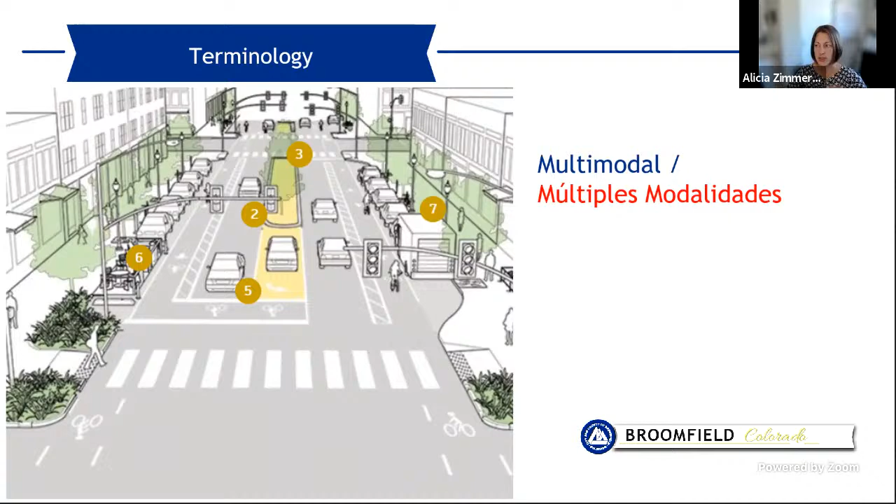Also, right next to them is a bicycle mode of travel and a facility for them. There's parking as well, and pedestrians along here. We're also considering transit, and making sure we consider the full range between pedestrians and bicycles, those in wheelchairs or on scooters, that type of thing. So multimodal means multiple modes of transportation, which is what we're focusing on.

The second of three terminology slides talks about the pedestrian realm. Sidewalk, most people are familiar with that one. In this case, the yellow shows what we call a detached sidewalk, just away from the back of the curb. An attached sidewalk would be if this graphic showed a sidewalk in that orange area, meaning it's attached to the curb, right at the edge of the roadway. Those two types of treatments feel very different, so we'll talk a little bit about that.

A multi-use path is also usually behind the curb. We're talking about it here as something that can be right behind the curb or further detached, and is usually a little bit wider than a sidewalk. The goal for a multi-use path is usually to accommodate those on bicycle as well.

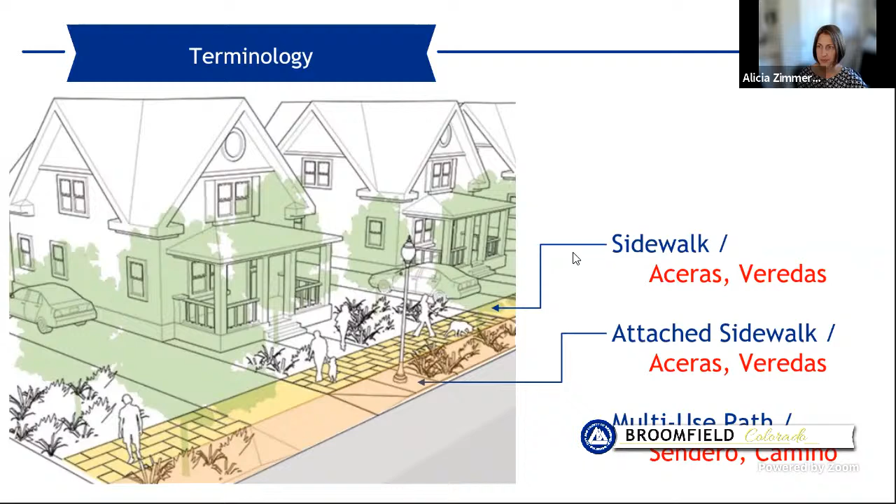Our last terminology slide has quite a few on it. Pedestrian refuge is the first one, and you'll see them, you already have them on Midway. It's the spot that provides a refuge in the middle of a crossing movement for pedestrians. All that means is it makes it a little more comfortable because you're crossing one direction of traffic and having a break before you cross the rest.

Bump outs are our second one, shown in this yellow area. You can see the curb, sidewalk, and pedestrian space are bumped out, in this case kind of shadowing where the parking had been. We'll go through the benefits and reasons you would consider them later.

That's what that's called. Then we have this general term, bike facilities or bicycle facilities. The facilities part is what confuses people if you're not familiar with it. All a bike facility is, is a space or some accommodation for people riding a bike. Generally, a bike facility is something like a bike lane or some of these more specialized types of bike lanes. Sometimes a bike facility is even shared lane markings in the middle of a roadway. We'll talk more on that, but even these markings in the middle of the intersection would be considered part of a bike facility.

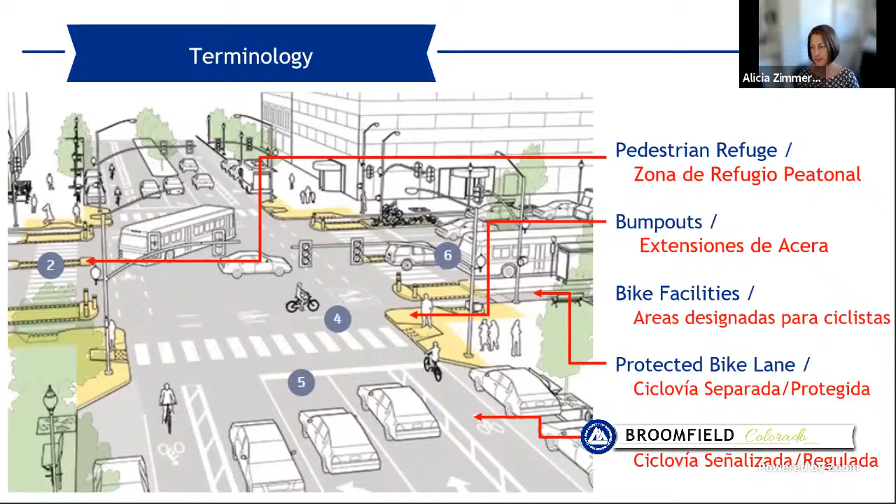All right, so having gotten through that terminology, we'll get a little bit more into the meat here, and I'll turn it over to Marc, who's going to talk about project background.

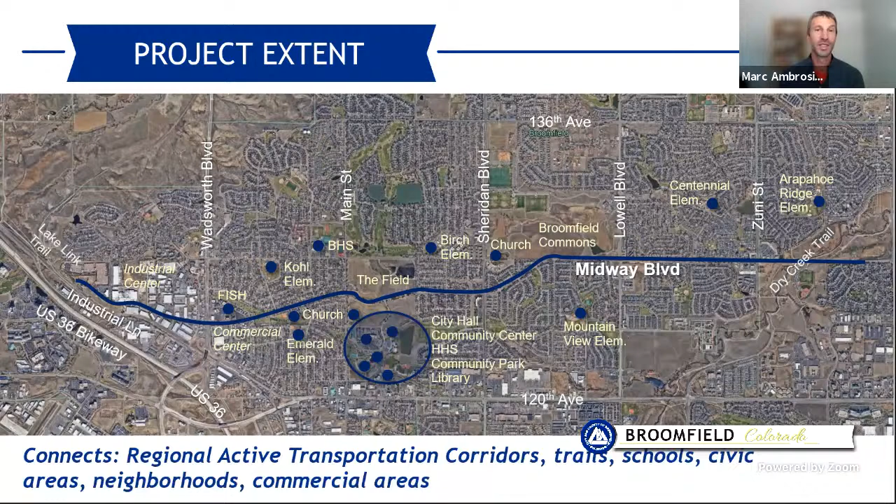So why are we meeting today? This meeting is part of our effort to reach out to the public and the people living in Broomfield. We need your help in identifying the solutions that are going to make Midway Boulevard safer and more equitable for everybody using it.

Midway Boulevard is, as we've seen, a really important corridor to the community, and your voice is going to be essential in the development of this plan to ensure that this corridor meets the expectations of the community and works really well for the people who live near it and use it on a daily basis. Next slide, please.

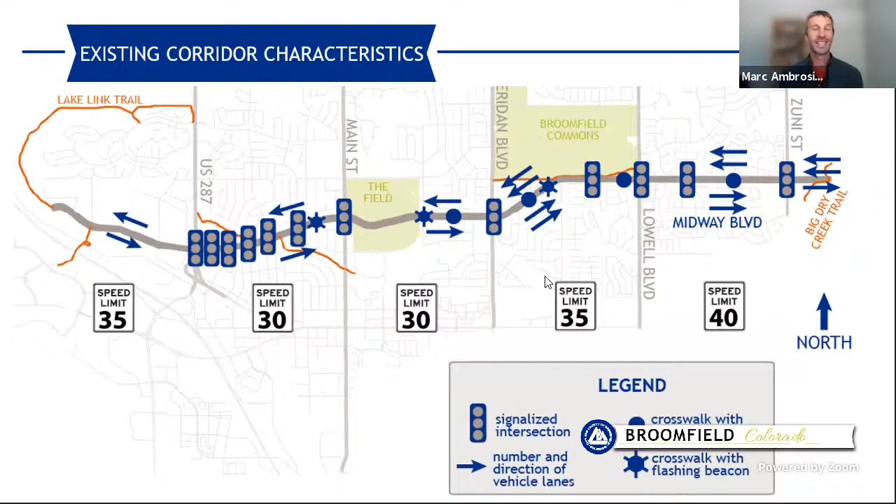This slide is showing average daily vehicle traffic. This is traffic averaged over a 24 to 48 hour period that we're seeing on the roadway. It represents a daily traffic volume over a 24-hour period.

On the western section of the corridor, west of US 287, we have lower traffic volumes relative to other areas. Around the field and the government buildings, traffic volumes are a little more modest than between US 287 and Main Street and east of Sheridan Boulevard. When we're talking about numbers like 16,000 or 17,000, those are pretty high traffic volumes on this corridor—about a third of what you'd see on 120th, but still pretty high.

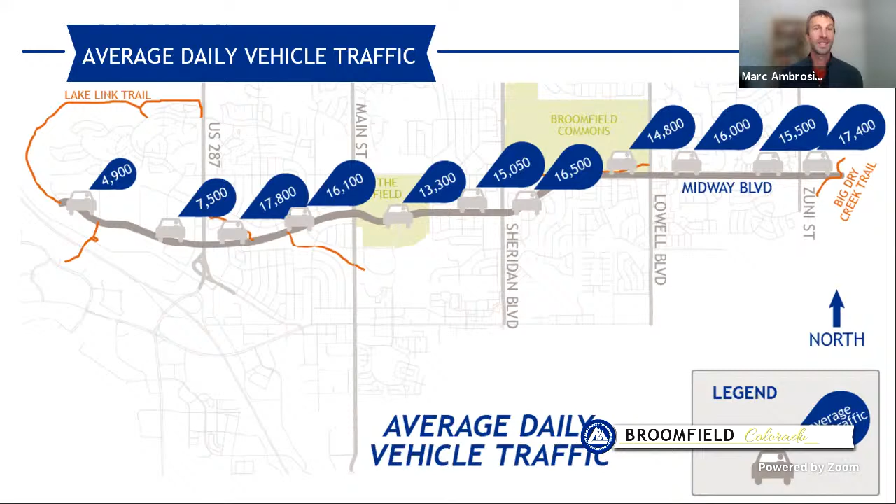This slide takes a bit more analysis to understand. I'll jump into the top half and describe what you're seeing. We're looking at end-to-end trips from major intersections—cars going from, say, US 287 all the way through the corridor to Zuni, and similarly from Main Street to Zuni as you move further east on that top section.

I want to point out the numbers. Of vehicles starting at US 287, only 12% go all the way through the corridor to Zuni Street, meaning 90% of vehicles are going somewhere on or near the corridor. We have a very similar distribution on the bottom half: westbound trips starting at Zuni going all the way to US 287 are only about 13% of all vehicles, again showing these folks are going somewhere along or near the corridor.

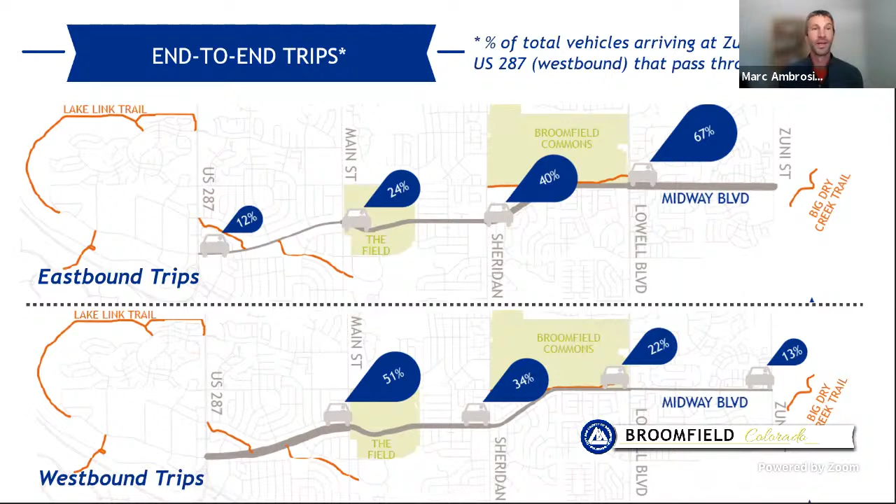This tells us that this is not cut-through traffic or regional commuting traffic coming from Thornton or further abroad. It indicates that these are people who live on the corridor. So when we think about things like people driving over the speed limit or the amount of traffic, that's really us. I think that's important to keep in mind when coming up with solutions to some of these issues on the corridor.

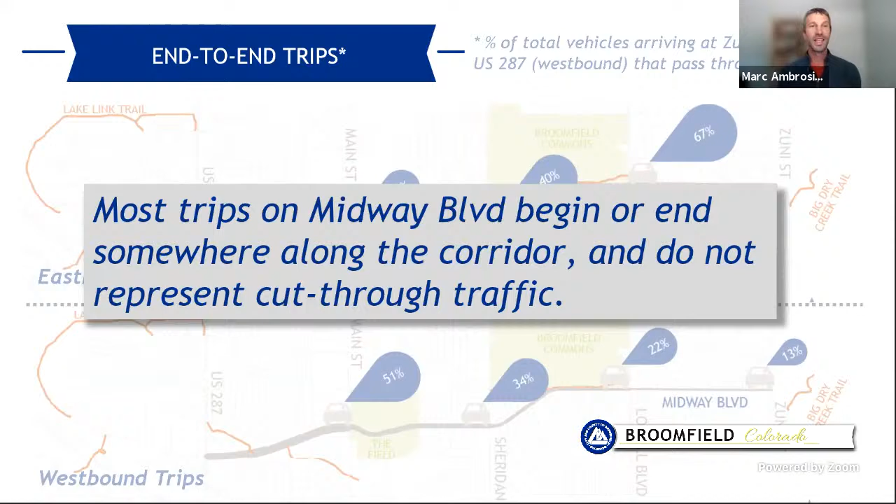Now I want to step back a little bit. We spoke about the 2019 bicycle and pedestrian assessment. That assessment told us that within Broomfield, 20% of the pedestrian and bicycle crashes are happening on Midway Boulevard, and that's really significant. I think that really helps drive home the point of why we were focusing on making improvements for bicyclists and pedestrians. This is a heavily used corridor by these members of our community, and we need to make sure it's safe out there for them to ride along it and to cross it.

Now, I don't want to take anything away from the vehicular crashes. There are absolutely vehicular crashes along the corridor as well, so we're going to be looking at ways to make safety improvements for all modes of transportation through this corridor. Next slide, please.

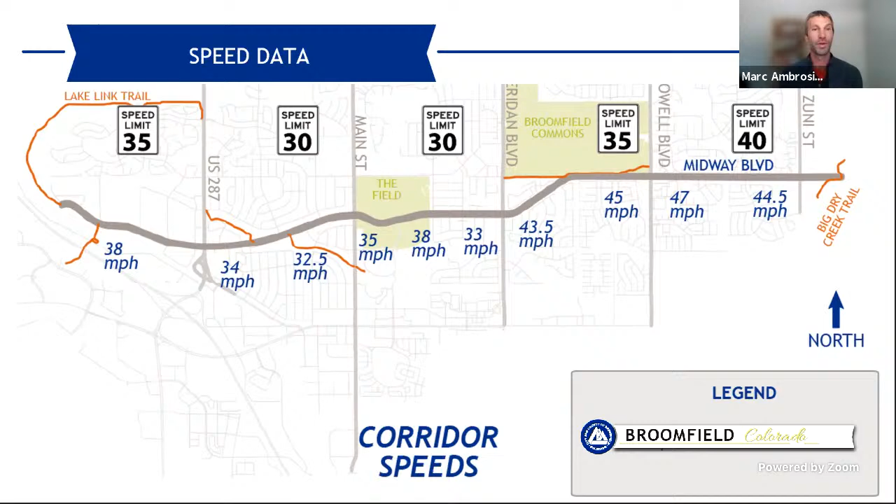This is an average over a 24-hour period, so it includes congested periods like the morning and afternoon when people are dropping off kids at school. Those might bring down the averages, and we might have to look at this data more closely to really understand in the off-peak hours of the day, which is most of the day, whether people are going faster than that 85th percentile we're showing here. Next slide, please.

All right, I'm going to turn it back over to Alicia to bring us through the rest of the existing conditions information. Thank you, Marc. So I'm going to talk a little bit about what that data we've gathered, which is really just empirical data, means for Midway and how we start looking at it. Certainly this isn't the extent of it, but just an example here.

Broomfield uses national and local guidelines and standards for developing their roadway and many other things. One of the standards they're starting to use right now is a new standard from FHWA, the Federal Highway Administration, that shows a speed versus volume chart that helps agencies determine what type of bicycle facility is appropriate on a particular roadway.

The reason I'm showing you the bicycle piece of how we might use this data is because bicycle infrastructure is an area of transportation planning and design that is probably moving the fastest and has some new precedent throughout the United States, and as such is less familiar to folks.

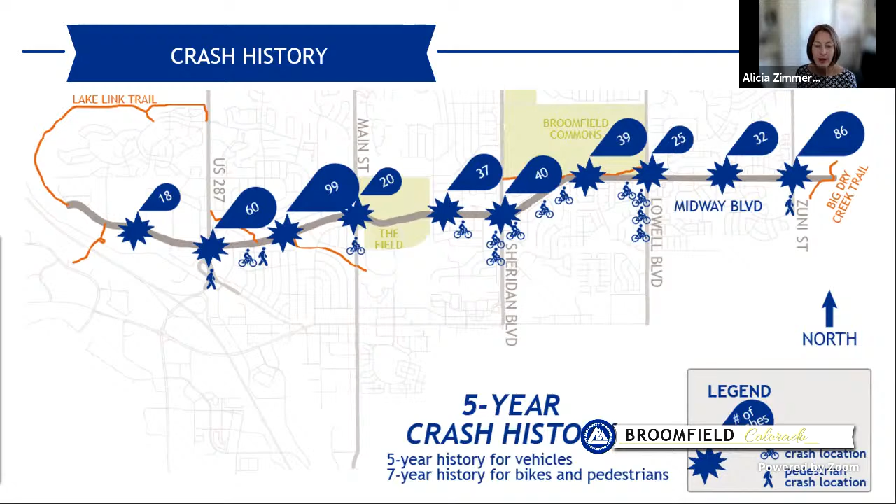Caleb, feel free to unmute and correct me if you were the crash picture guy here—correct me if I'm wrong. Hearing nothing from Caleb, we'll go ahead.

The next question is: does the FHWA graph showing volume and speed take into account the current vehicles per day, or the goal of the future reducing the amount of vehicles per day?

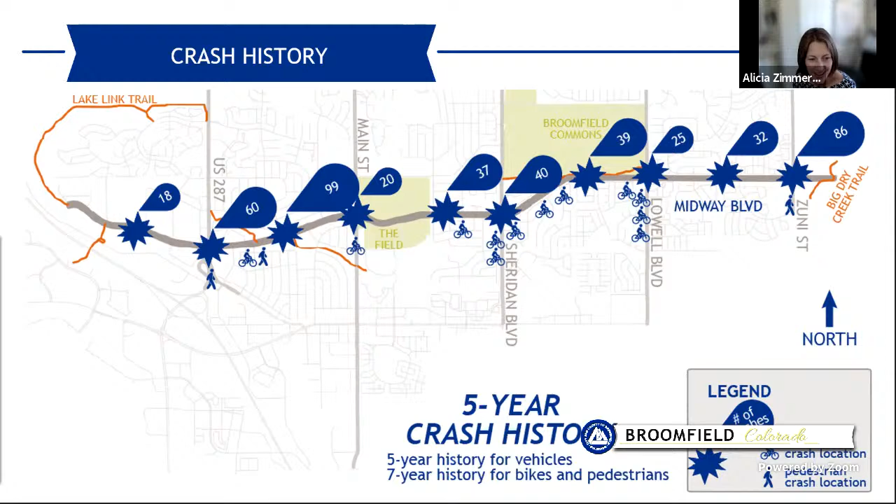Lisa, that's a really good question. This graph is used a number of different ways, and the way most agencies use it, because it's most defensible and straightforward, is by using the number of vehicles per day that we've measured.

Some agencies are projecting future volumes and also using it here. Now, a lot of places looking at protected or separated bike lanes are also in areas that are more built out, so the future volumes aren't as different. But I think your question actually refers to: if the volumes are actually going down, or the goal is to get the volumes to go down, what if this dot goes back into a different type of bicycle facility?

That's honestly a condition I've never seen fully happen, because usually the mode shift from people in cars to people in transit, which might reduce the volume on a road, just offsets future growth. There are a few locations where it has actually overall reduced traffic, but we haven't been at a condition where it actually changes the recommended facility type—so certainly something to consider at a threshold, when the dot is at a threshold.

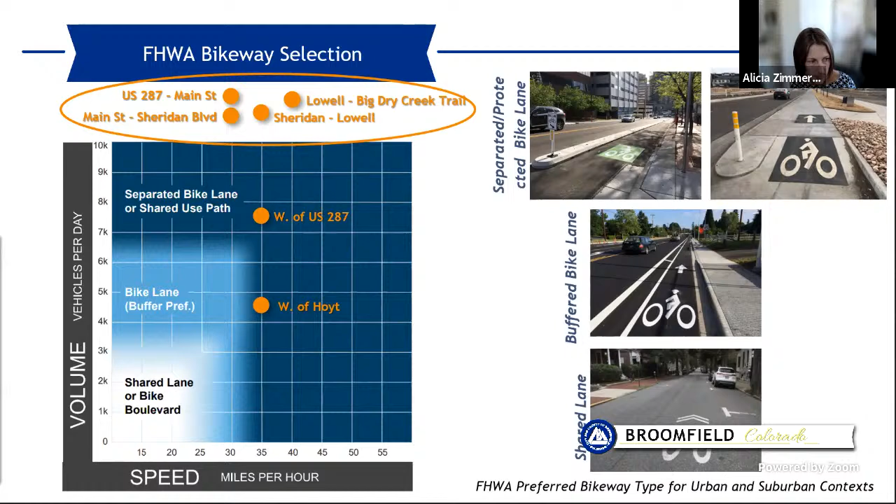Okay, with that, I think we're going to move on. I am going to, once I can get to the right slide here, turn it over to Marc to start digging into our toolbox on ideas. All right, thank you, Alicia. So yeah, we are going to jump into now talking about some toolbox and ideas. I am going to talk a little bit about how we're thinking about the corridor to begin. So next slide.

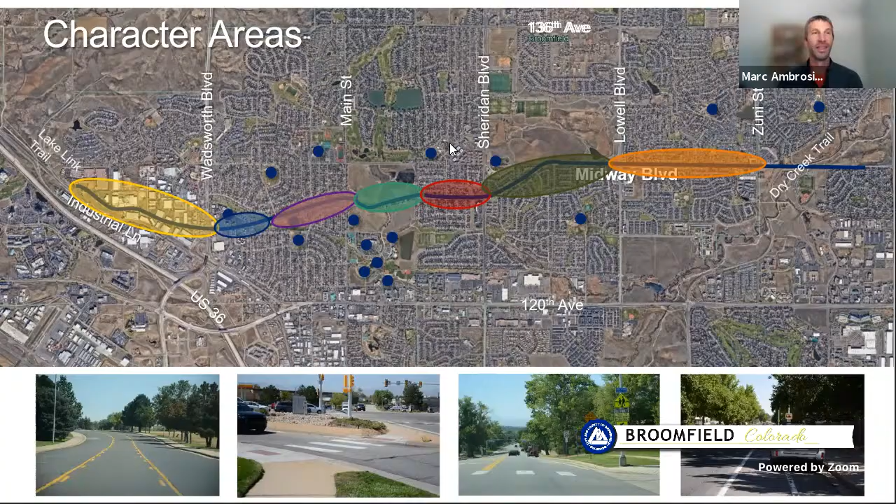Next slide please. So starting out again with that very western section, this is the Lake Link Trail to US 287. This section of the corridor is probably one of the least complex from a roadway standpoint. This is an image of this area — pretty wide asphalt between the curbs, narrow attached sidewalks, no bike lanes. In this area we see pretty heavy truck traffic, or percentages of vehicles, a lot of those heavier trucks because the land use is more industrial. That's also why there is this center turn lane here — trucks will park there, stage there, and so that remains pretty important out here. Now, with that said, we do have a lot of space, and so striping in bike lanes is a pretty easy solution out here, and maybe something that we're going to look at.

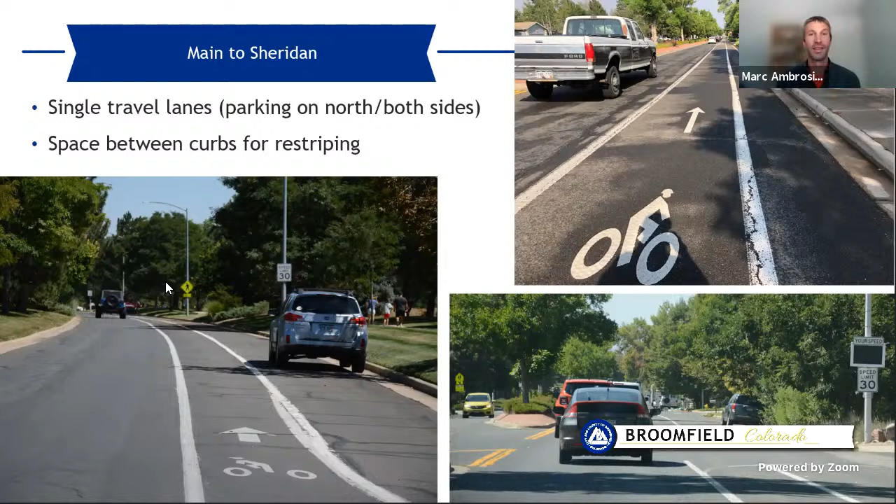So there are a few challenges out here, but we also have some really nice opportunities to make changes through this area. Even things like adding a buffer to the bike lane might make people more comfortable in this area. All right, next slide, please. The rest of the roadway, we're going to talk about in one section.

This is the 4-lane section. It's Sheridan and everything east out to Zuni. This is 4 lanes with higher travel speeds. I think the speed limit is 40 out in this area. There's still that median with mature vegetation in it.

As you can see, there's some limited space in this area for actually making bicycle facilities on street. So this might be an area where we'll have to think about or explore different ideas for how to pull those bicycle facilities off the street. The other thing to note is it's pretty high speeds and there's a lot of traffic volume out here, so it might not be comfortable for everybody on this section of roadway on a bike.

In the image on the right-hand side, you can see this is the westbound direction. There's no sidewalk facility directly adjacent to the roadway, so that's an area where we have a gap. I also want to point out that the land uses adjacent to this area are primarily residential, and there's quite a bit of open space as well. So there are a lot of people around here, a lot of places people want to go, and we really want to make this a little bit more comfortable and accessible for people that don't want to drive and maybe want to use other modes of transportation.

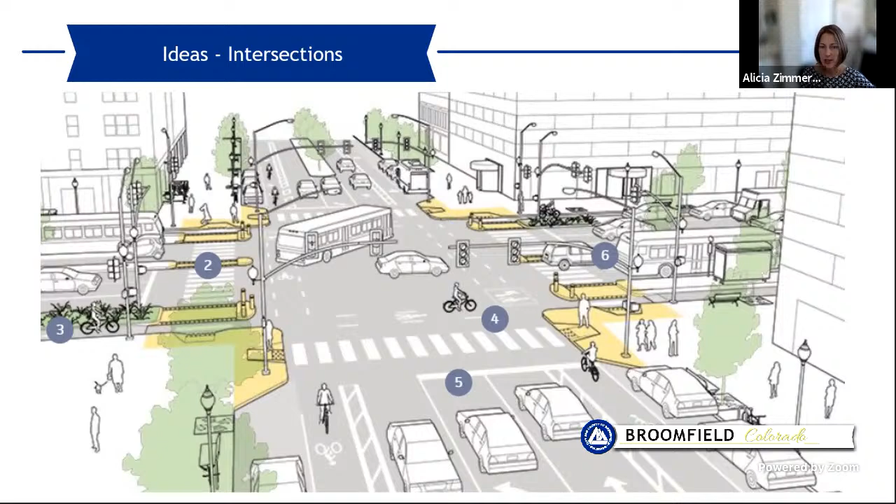So getting into our ideas here, starting on intersections, you're all familiar with this graphic already. Starting first on this bump out idea - my dog has come to join us, so I hope you don't hear her - but starting into the bump out idea, what bump outs are good for, we already talked about what they mean. They're pulling the curb out. Without a bump out here, the curb may have come right along about here.

Pulling the curb out at an intersection or even in a mid-block location means it reduces the crossing distance for this guy here walking across the roadway. That means it's easier, more comfortable for him to cross, and he's exposed for a shorter period of time. It also means he can see an oncoming bicycle or traveling vehicle better, and the traveling vehicle can see him better than, say, if there was a parked car here and he had to walk between them.

So that is one of the benefits of a bump out. The other benefit of a bump out is that it can help with speed mitigation in two ways. It often increases what we call side friction.

If you think about driving really close to a parked car, you're much more likely to pull back on your speed a little just to make sure you're doing it exactly right. Adding a bump out can do that too, because you're closer to that curb, even if you're in a car driving straight through.

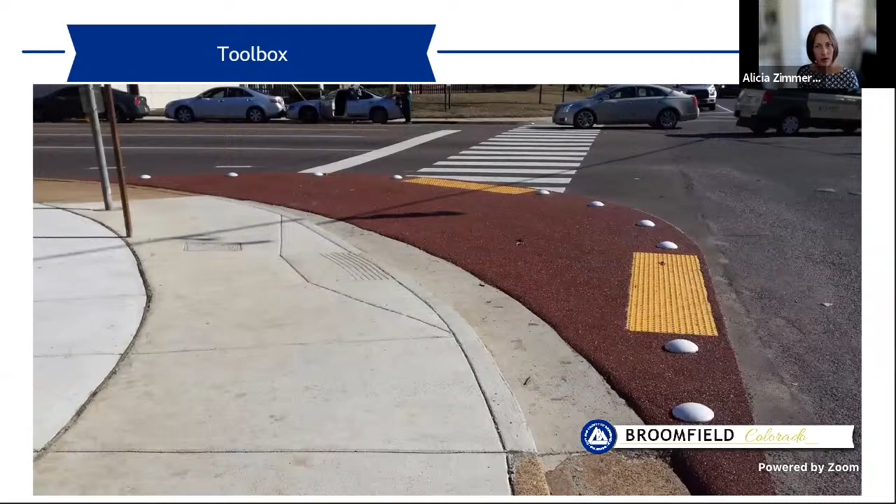This picture is a little different, but it's just to remind us, including the design team, that we don't have to look at these in-depth permanent materials in every instance. There may be some quicker win projects in a slightly different material type that could either become permanent later or give us a good test of what might work in an area. So keeping an eye on that kind of temporary installation as well.

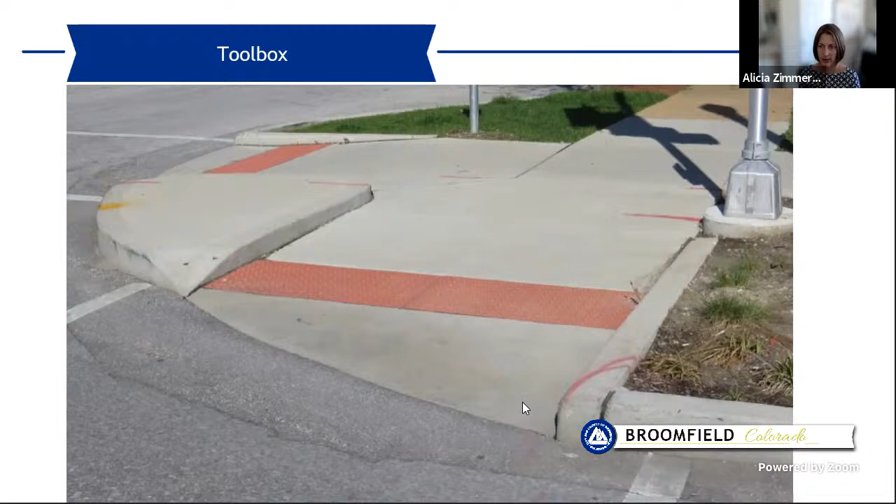Here's a more permanent bump out, one you could very well see along Midway. You have your truncated domes, your redesigned curb ramps to help those in wheelchairs and with visual disabilities. Also, you can see that curb radius here would probably slow me down coming through.

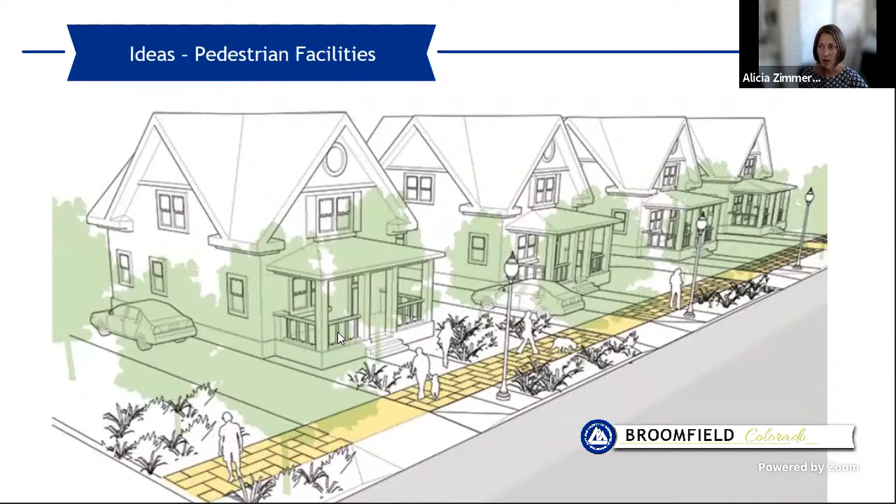As far as pedestrian facilities, you'll be a little bit more familiar with most of these, most likely. Multi-use paths, you have some, certainly considering widening the sidewalks if possible. We know most areas are really constrained by existing right-of-way or mature vegetation. We certainly don't want to take away that because this is an amazing area for that type of thing.

So one of the things we thought about is, well, in areas we can't widen the sidewalk or make a multi-use path, if that's what makes sense, what else can we do? One of the things we looked at was a soft surface trail or soft surface widening. There are maintenance challenges that we're talking through with public works and maintenance, but just another idea we may be considering.

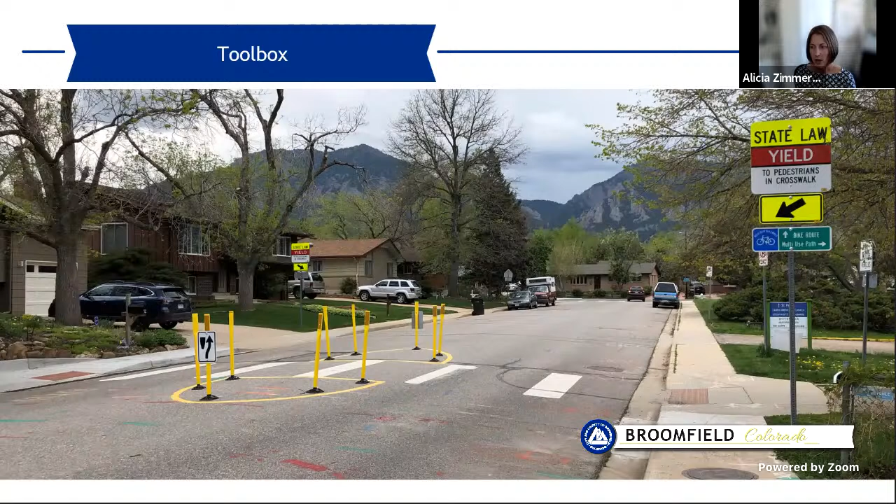Another reminder that we can look at some of these with temporary, short-term, or quick action type materials as well.

This slide shows that when we think of improvements, especially to the transportation system, we think of changes on the ground, changes to the curb or sidewalks, physical changes out there. But there are also operational improvements we can make that don't necessarily require going out there and installing something. One example is a change to signal operations.

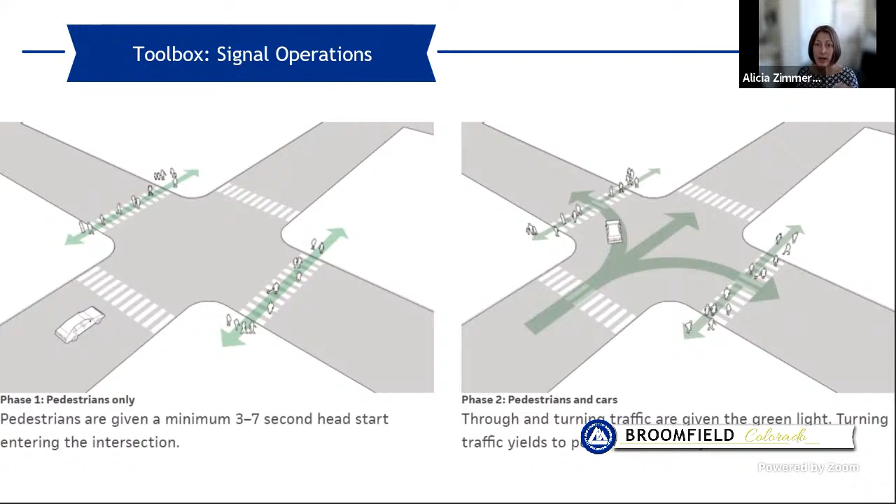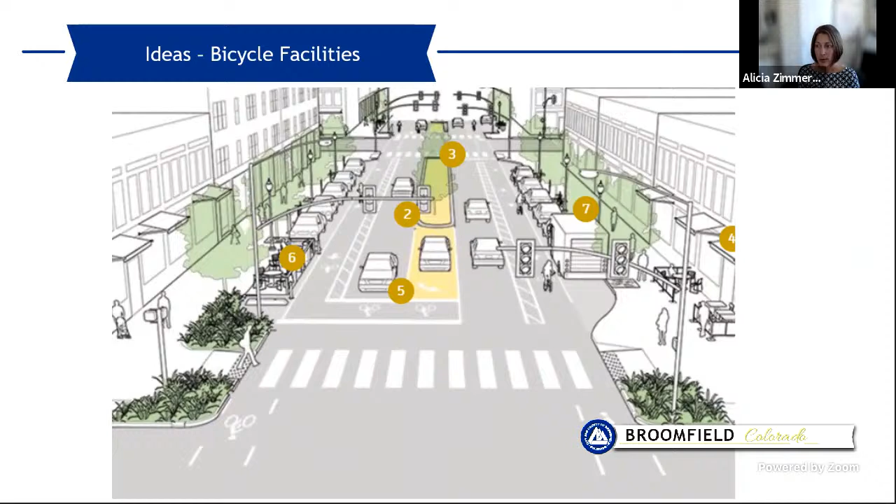All right, a few bicycle facility ideas before we wrap up. Looking at our toolbox, this shows a few different things: some green markings on the ground, a buffered bike lane, and an enhanced bicycle lane at a transit stop. The green markings help people on bicycles know when they might intercept a car, and help people driving know when they might see a bicycle in their space. So these are conflict markings plus some additional horizontal space for those on bicycles.

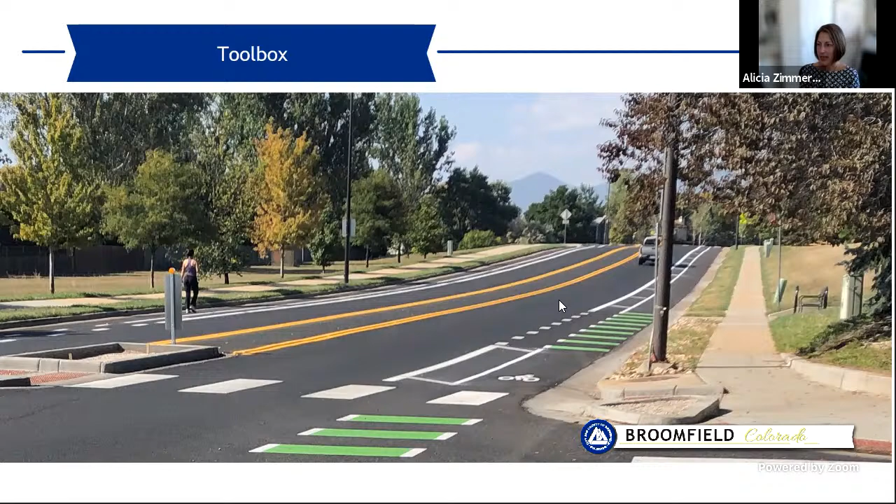One thing I want to point out is that enhancing or installing bicycle facilities can also help pedestrians and those in a car. It helps those in a car because it delegates a space for people on bikes, so you have separation for the majority of your traveled path. It helps pedestrians because it gives additional separation. If you're over here and cars used to travel right next to you, and now they're moved further away, you have a bit more comfort in your travel path.

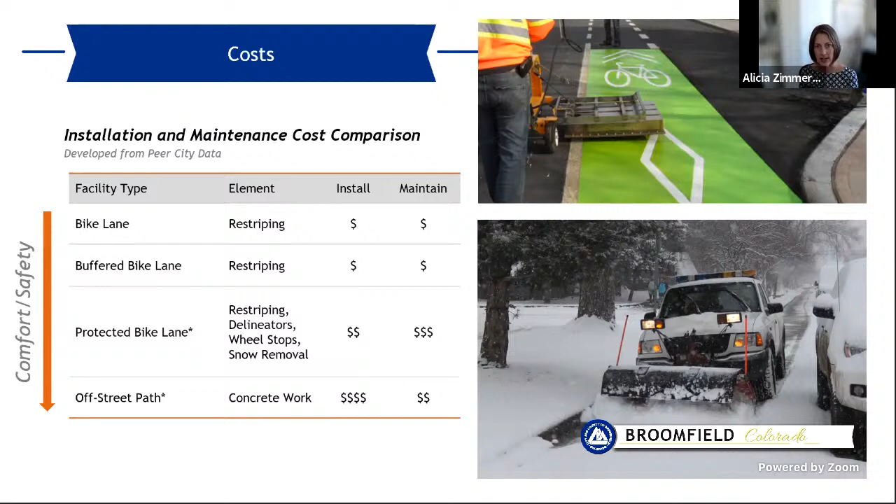All right, with that, and hopefully you could hear me through my dog's ruckus here, we're going to start with our last, well, second to last actually, polling session, and then we're going to get to any remaining questions. I saw Ed, you had a comment here as well. So let me pull up the polling.

These next three questions, asked all at once, are about whether we're looking at the right types of things. I'm sure we missed something, so please tell us what we missed. The questions are: do you think any of these might apply to Midway? If yes or maybe, share in the chat which ones and where. If no, tell us which ones you think are a bad idea for Midway. Question two asks the same, except whether you think any of them would actually make things safer and more equitable. The last question asks whether there are other options the team should consider for Midway, which is more of a short answer. Feel free to answer additionally in the chat. I'm going to launch this now and let you read through and answer.